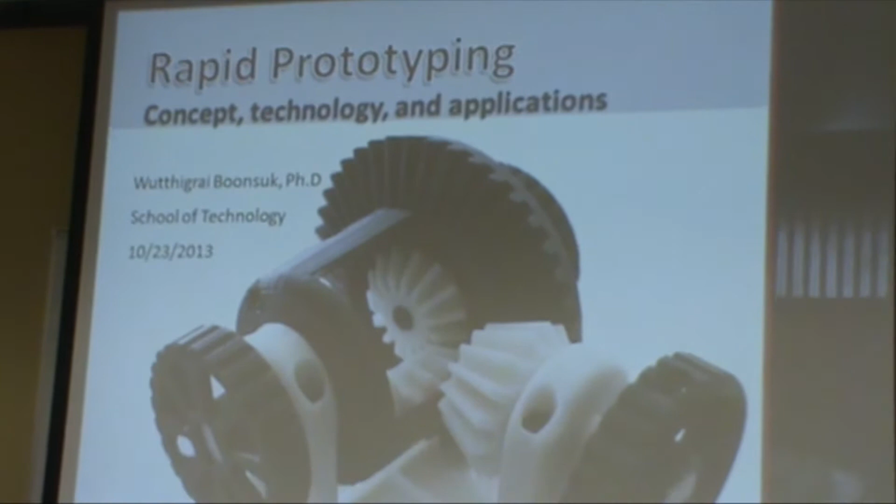Thank you, Dr. Wabai. So today I want to talk about rapid prototyping. Basically, we're going to go over some basic concepts and the idea behind the importance of this technology, why it's important, why do we need it, and also the applications for this technology that we can see in the market right now.

So let's start with what is rapid prototyping. Sometimes I call it RP, many people also call it RP in this case. So I have two definitions here. Basically it involves a machine that can automatically create a physical prototype from three-dimensional models, or sometimes we call it a CAD model, and it can create it in a very short period of time.

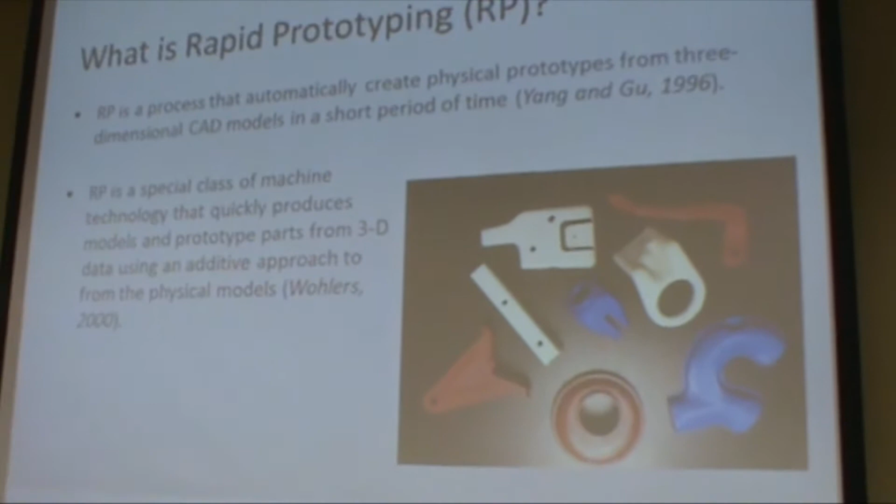So we've learned a little bit about RP from this definition, but I'm going to go into more detail about why this technology is important, why we need to know about it. So before we start talking about RP or rapid prototyping, let's go back a little bit and learn about why it's important to have a prototype. Why do we need a prototype?

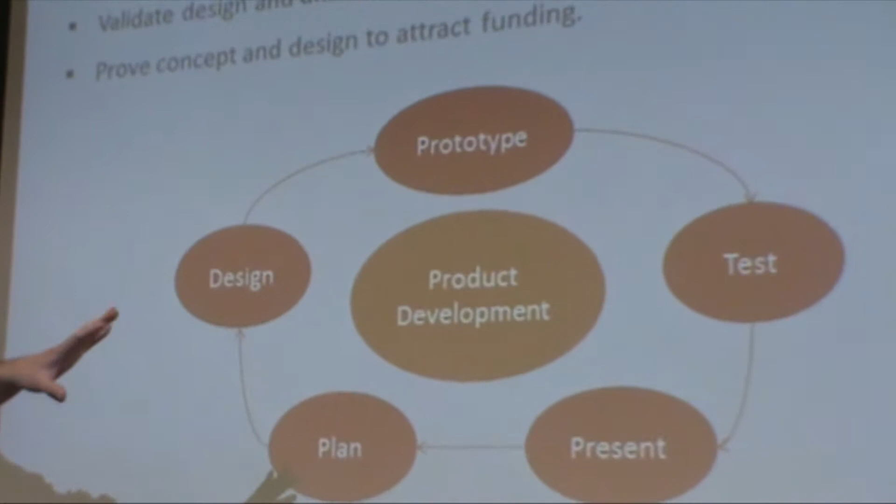Most of the time, prototype is involved in product development. It's kind of the main step in product development that you have to have. You can start from planning, designing, developing the prototype, and then make a test and present, go through some iterations until you get the final product's outcome.

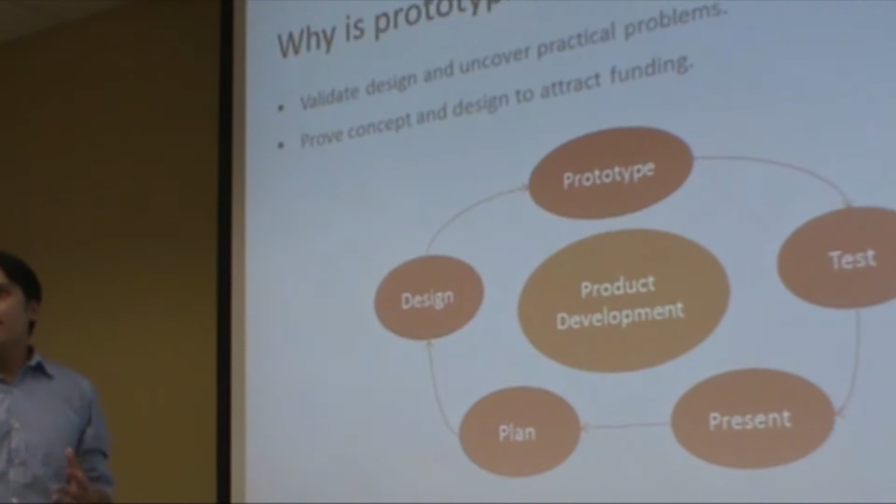Prototypes serve several purposes in this case, it's important to have a prototype because, first thing, you can validate your design. You can take a look at your prototype and look at what can be a problem with it. Sometimes you cannot really spot it if you look at it on paper or in your computer.

And also, a prototype is a proof of concept, right? Most of the time, people use it to attract funding. Without a prototype, it is sometimes hard to really tell your sponsor to support it.

So I kind of see this trend going on the internet, I'm not sure if many people here have seen it. Some small companies try to put their idea on a website and also make some prototype, then show how it works on the website and try to raise money using that website. So people who are interested in what they have or their idea make something like a pre-purchase, okay? So the company gets more funding and is able to push the products into real production. So I really see it becoming more and more this way. So I think that's how a prototype is very important.

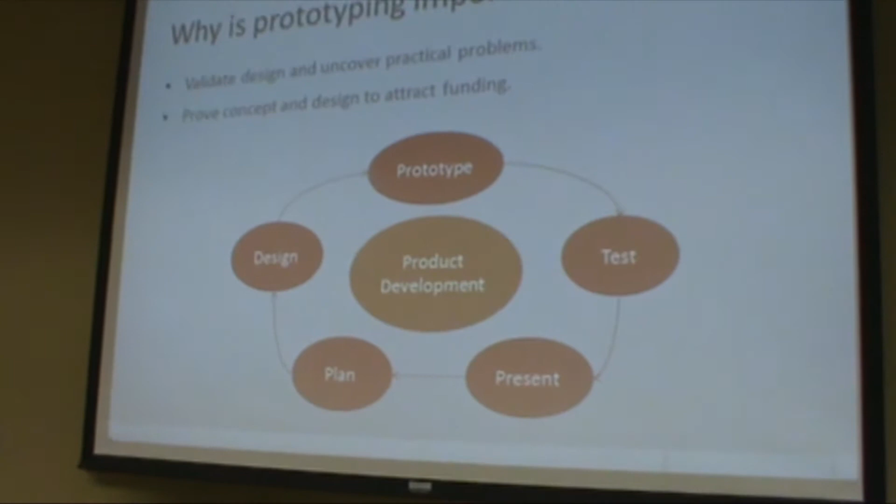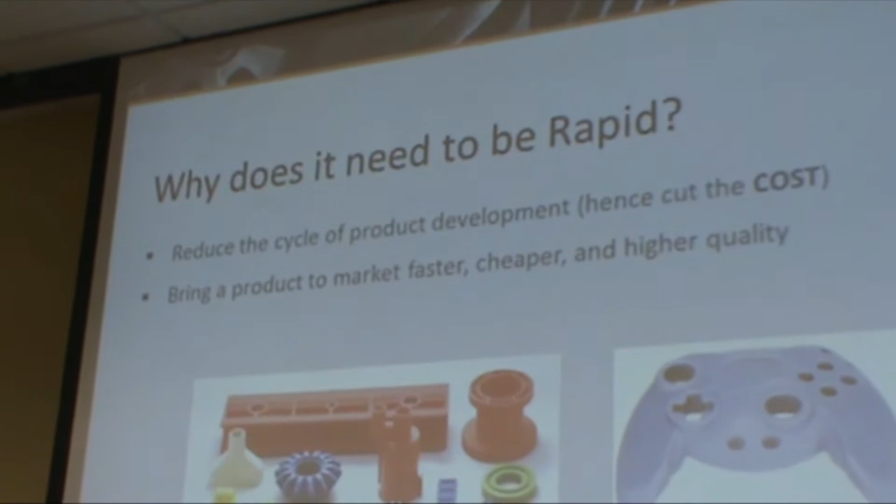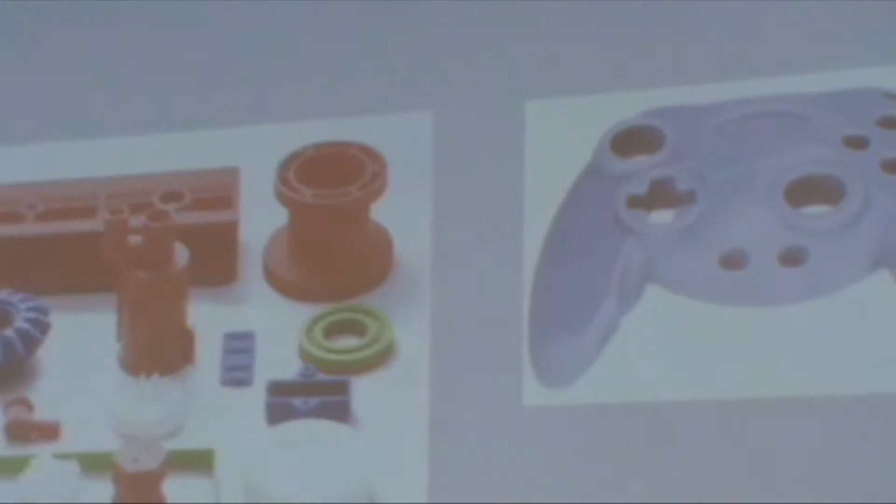So why does it need to be rapid? When you're able to prototype fast enough, you'll be able to reduce the cycle when you try to develop the products. And if you reduce the time, it absolutely helps you reduce the cost in production. You can bring your products to market faster, cheaper, and with higher quality, because you can validate your design and spot the problems before you have the final finished product. So prototyping will help you do that, and you'll be able to improve the quality of the products.

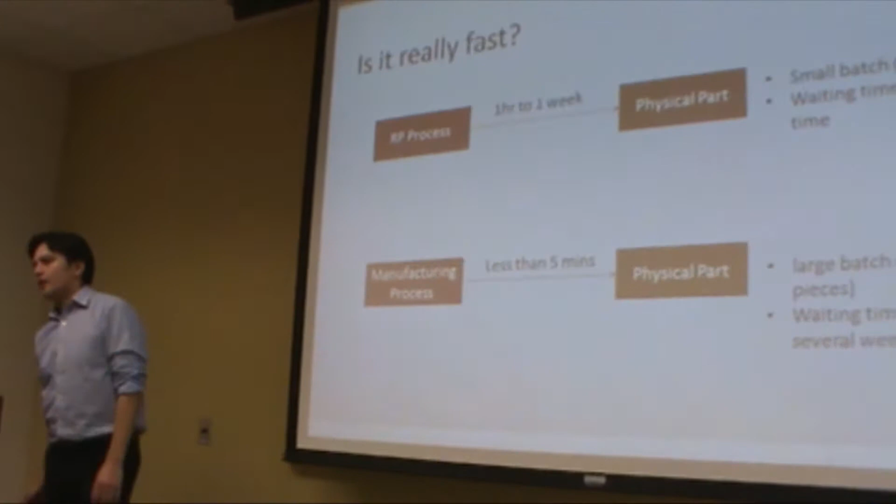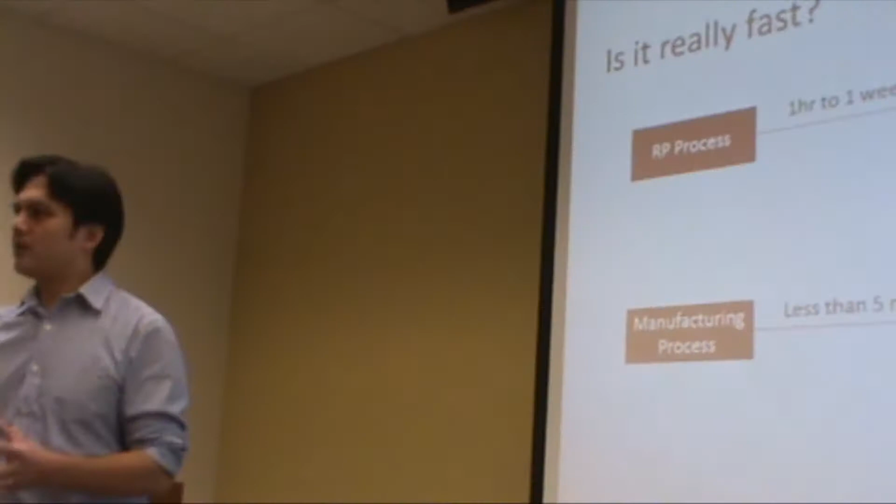It's kind of interesting that when we talk about rapid prototyping, we think we can create a prototype in a short period of time. It doesn't mean that this process is very fast. It's absolutely not fast. Rapid prototyping, the RP process itself, can take about 1 hour, 2 hours. It can be 1 day, 2 days, or even a week to create just one part.

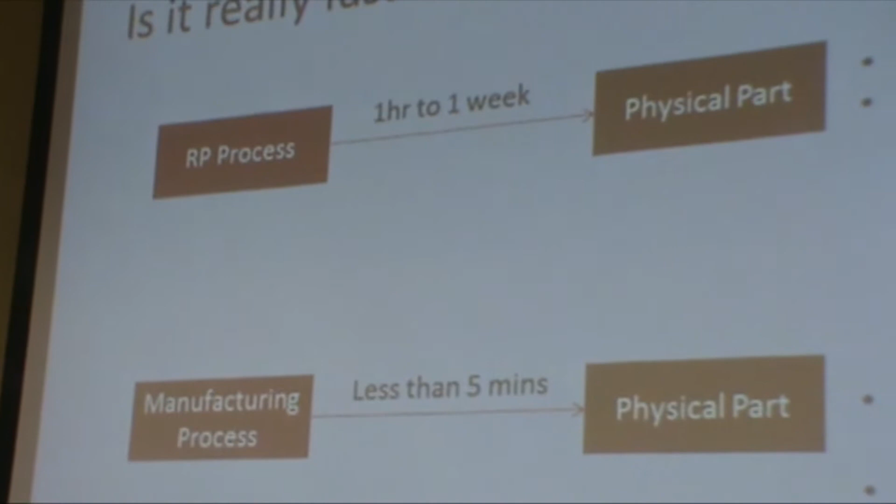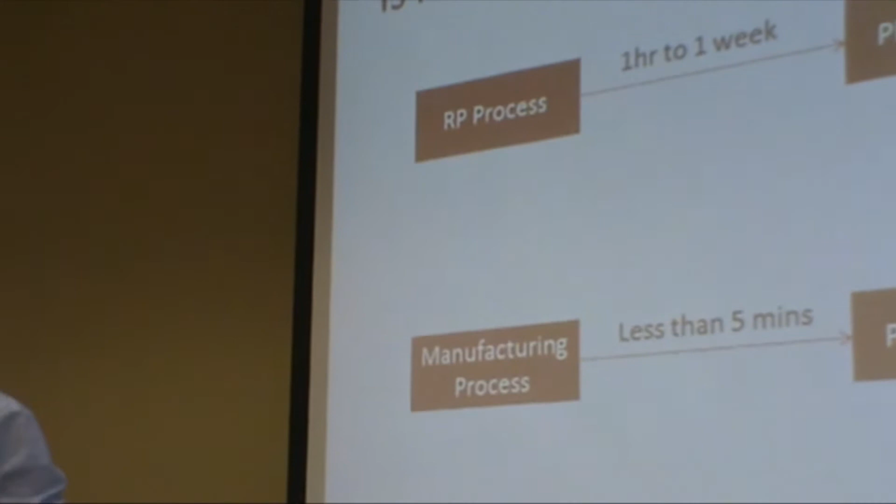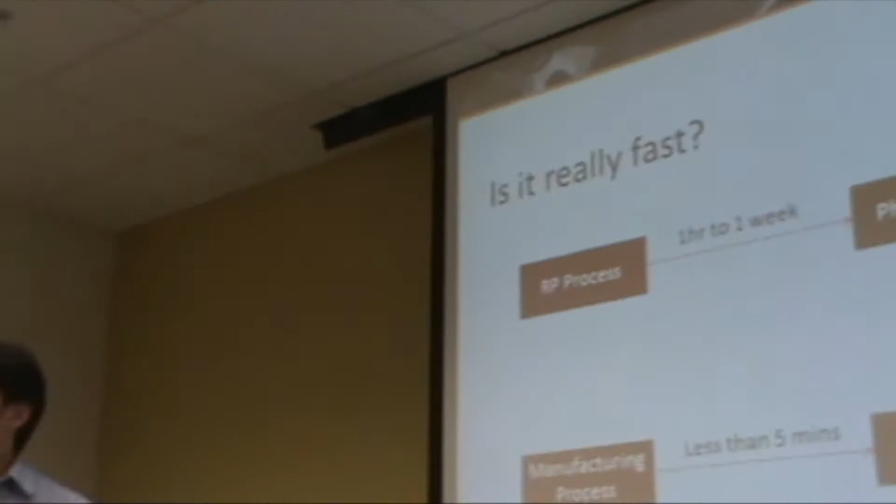If you compare it to a manufacturing process, something comparable like injection molding, the process for injection molding to make the finished part probably takes a couple seconds, 5 seconds, 10 seconds to get the real product out. So it's not really fast, but why do they call it rapid? Because the waiting time and the process time are equal. So basically, if you have the 3D model, you send it to the machine, you just wait until it's finished, and you get the prototype.

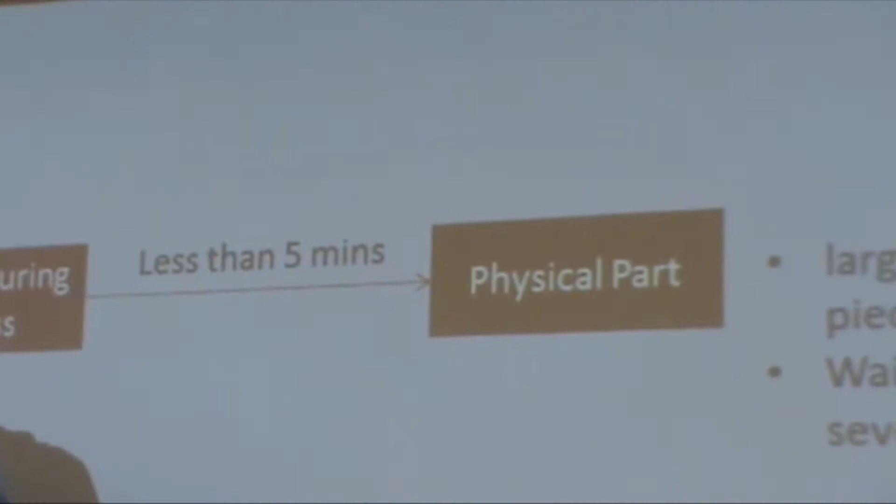For the manufacturing process, the problem is that you cannot order just one part or two parts. If you go to a manufacturer and ask them, can you make me 2 parts of this, they're going to say, if you order 2 parts or 100 parts, it will be the same cost. And the waiting time can go up to a couple weeks or even a month. The problem is in the manufacturing process, they need process planning to create the part. If you talk about injection molding, they need to make the mold, design the mold, acquire the materials, and then create the parts. So that time adds up to make the process longer.

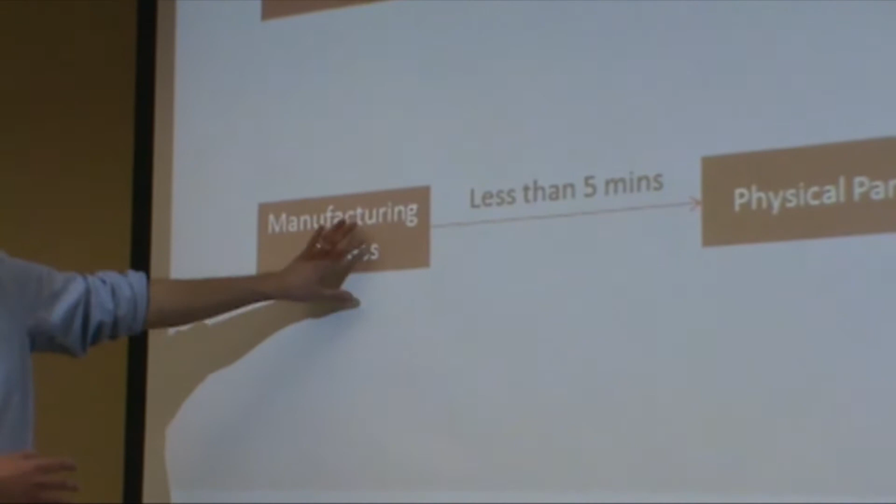Even though the real process is very short, the RP process serves it well. If you want to create just 1 or 2 parts, you just sit and wait. So this is why this technology has become more popular in the manufacturing field.

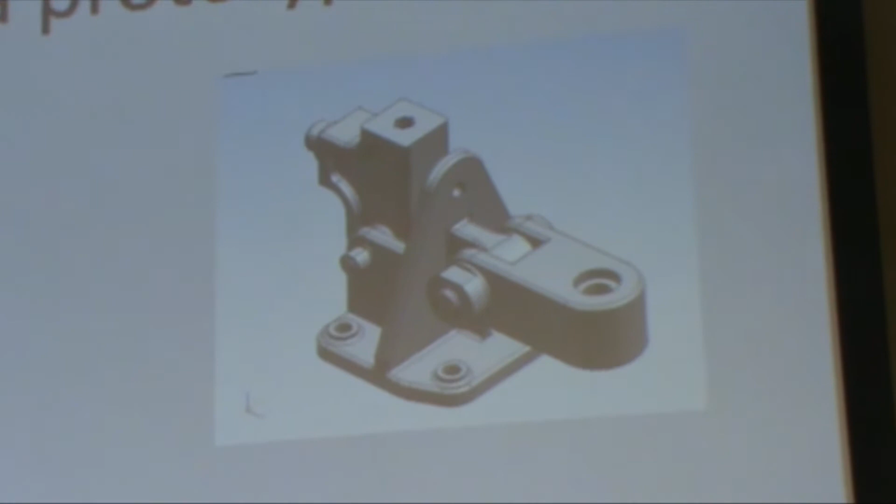So in the RP process, what do I need to make the prototype? Besides the RP machine and the computer, what you really need is just the CAD model, computer-aided design model. I know many people here are familiar with this term, but basically it's a computer model that you can design on the computer.

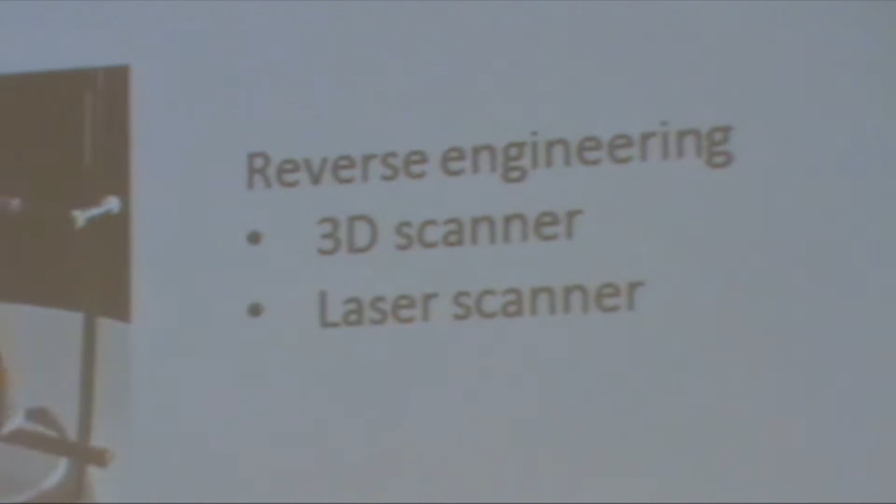So how do you get that model? There are a couple ways. The first one is you use CAD software, something very famous like SolidWorks, Solid Edge, Pro Engineer. This is when you create a design, you design your own physical part. On the other hand, if you have a part that already exists and you don't have the real CAD model, you can recreate it using a process called reverse engineering. Basically you use a 3D scanner, a laser scanner, so you're able to get the physical model and change it into the CAD model. That's how it works.

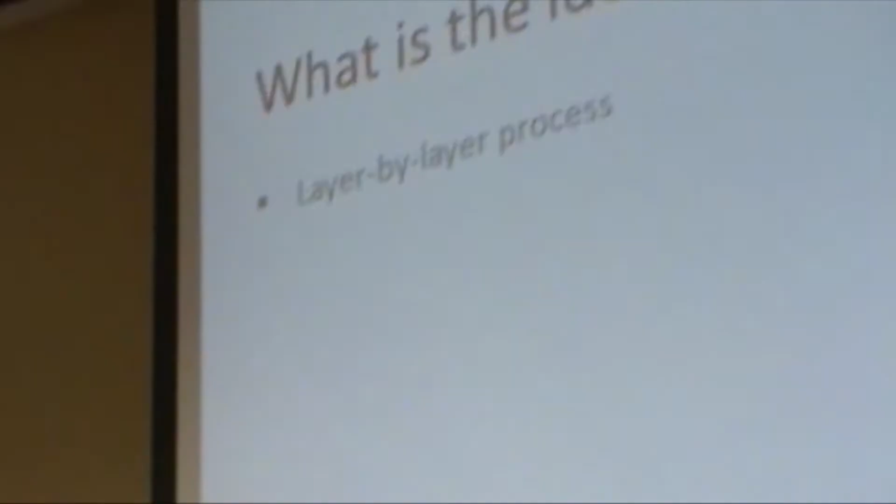What is the idea behind RP? Most of the time when we talk about RP technology, people think about layer manufacturing, additive manufacturing, a layer-by-layer process. So what does it actually look like? Let's say we have an apple, nice and crispy, red, delicious.

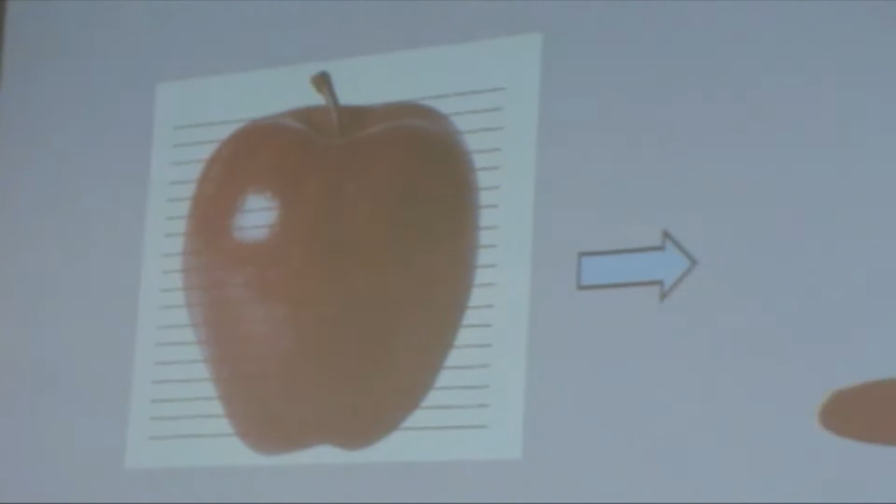Assume that this is your 3D model, and then what if we slice it, make it into very thin slices? What happens is you simplify the 3D geometry to make just a 2D cross section. If you take just one slice and put it here, it will look like this - just a 2D cross section or 2D slice of the apple.

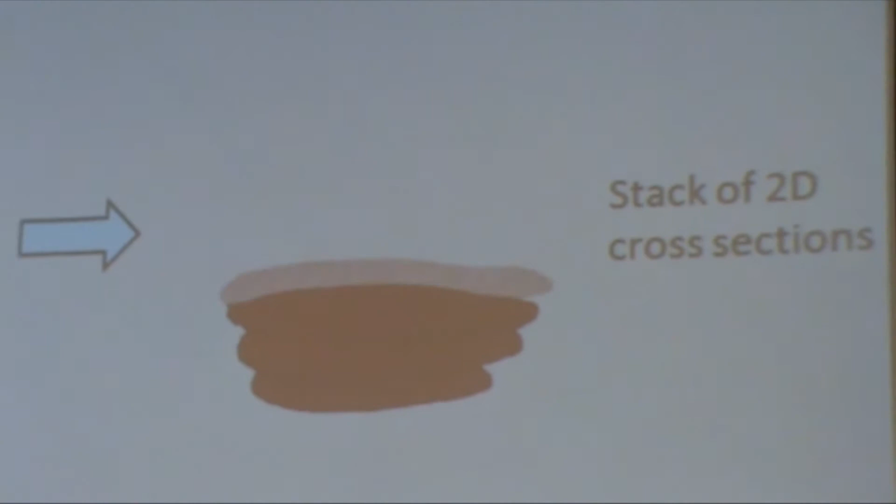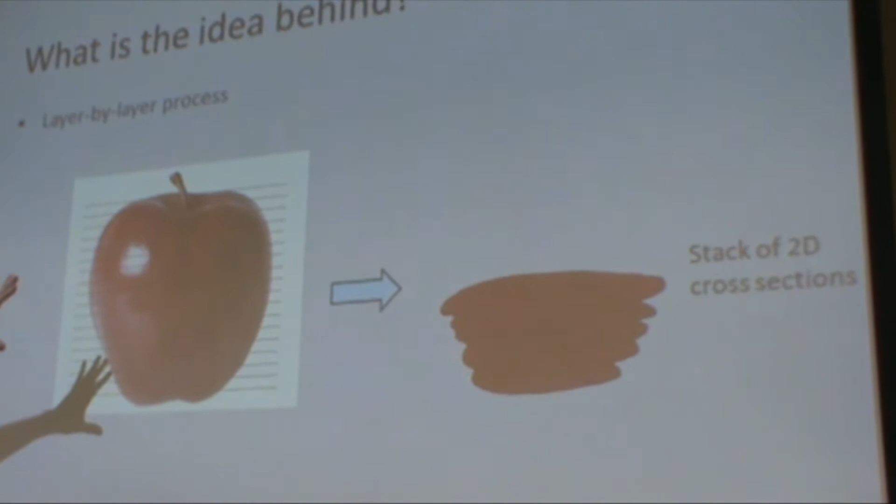And then what if we stack it up according to how you sliced the layers? You can see that you can really recreate the apple using something like this, and it's really simple and easy to do. So this is the concept behind the RP machine.

If you look inside the RP machine, you're really going to see something like this. This is one of the machines called a stereolithography printer.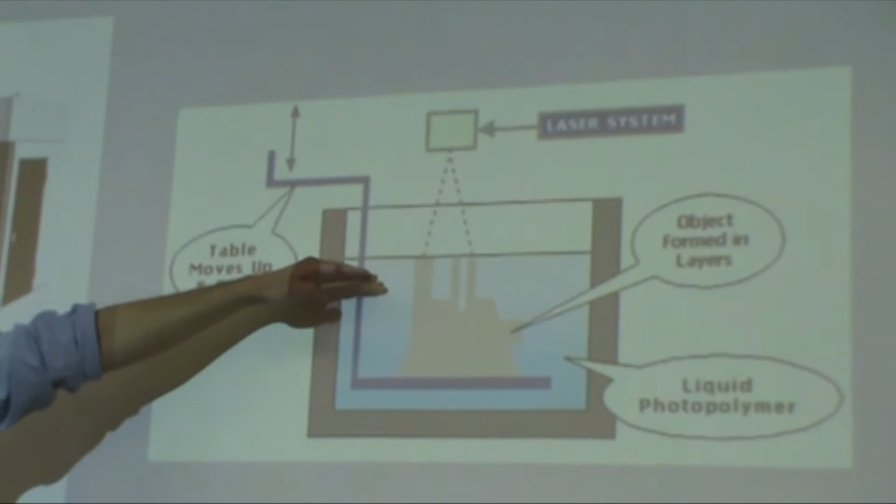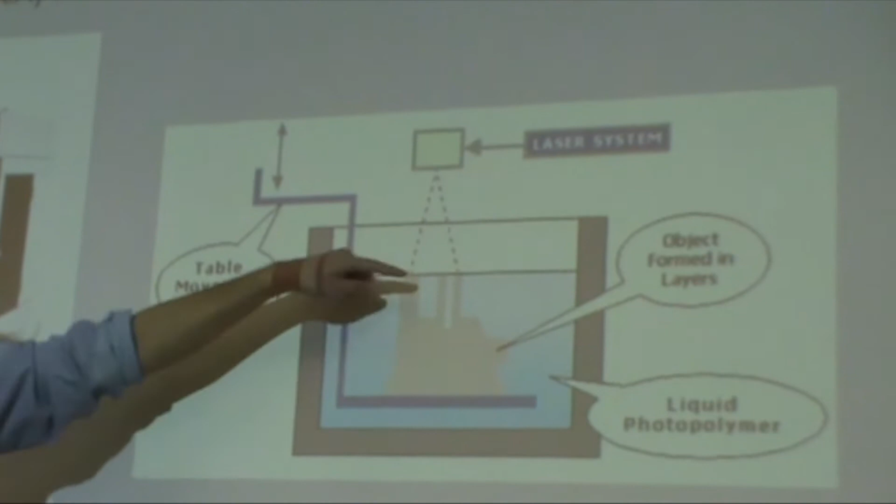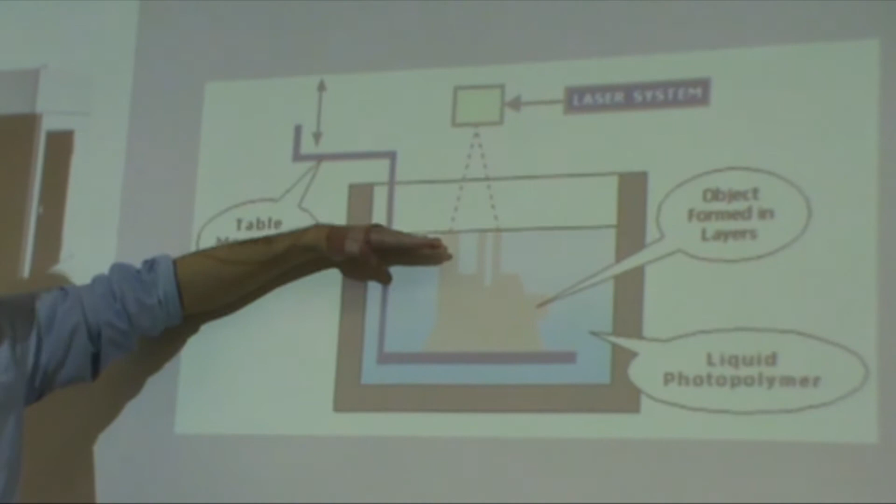So inside, there's a liquid tank with liquid polymer inside, and they have some kind of platform that dips into this liquid. We have a laser on top of the machine, and the laser will solidify the liquid polymer. For example, it starts with the first layer, and after it finishes, the platform drops down one layer, and the laser creates the second layer, and it keeps dropping down more and more until it finishes the part. So that's the idea behind the layer by layer process.

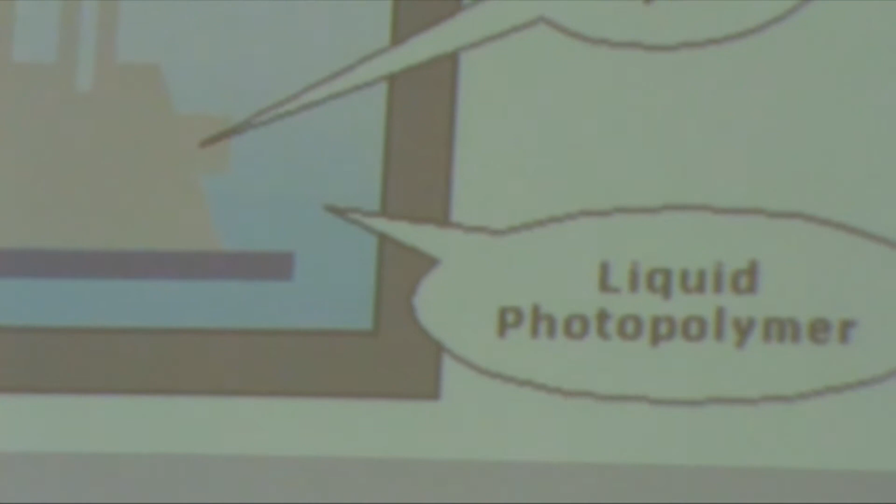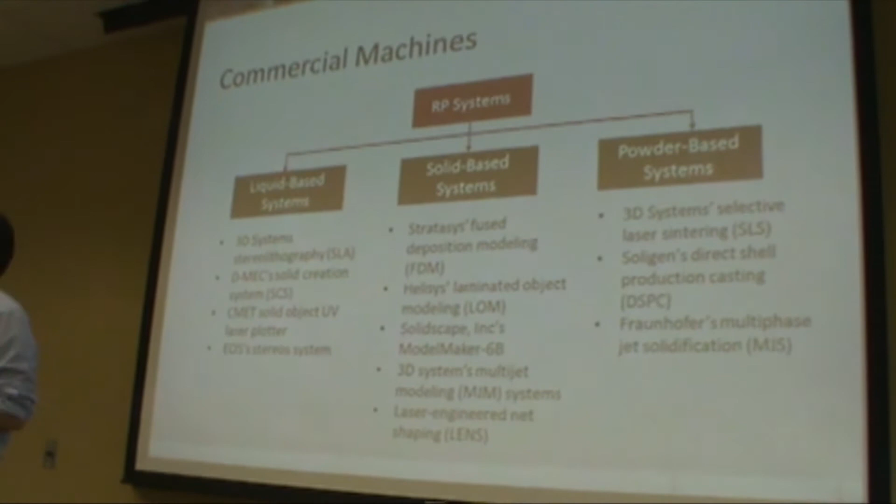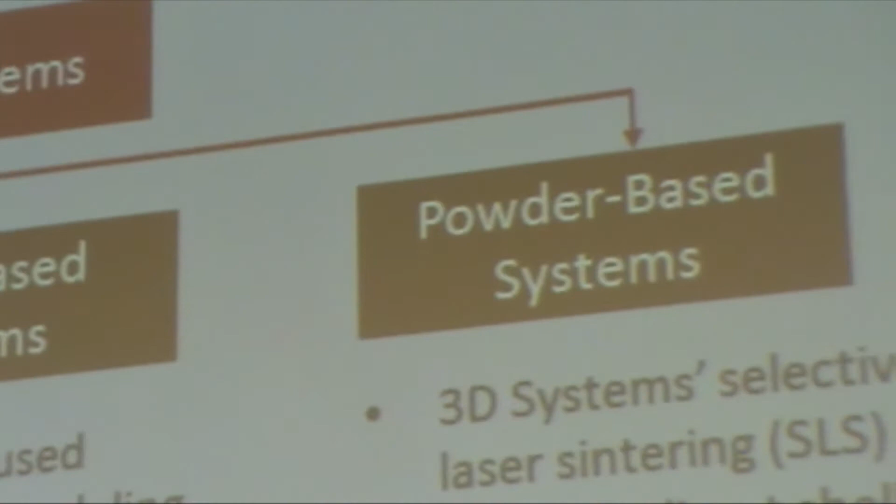RP systems have expanded a lot. We've seen since 1980 when they started developing the first machine, and right now there are so many of them in the market. If you search in Google for rapid prototyping machine, you will see maybe hundreds of them from different companies.

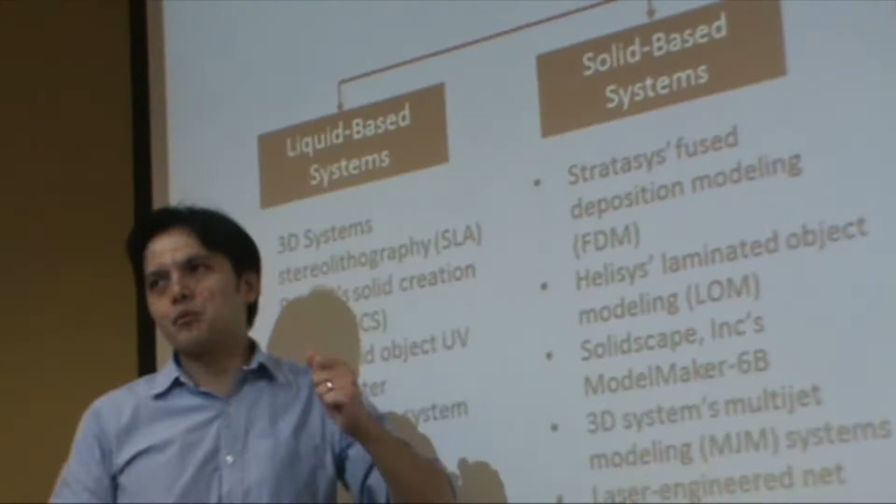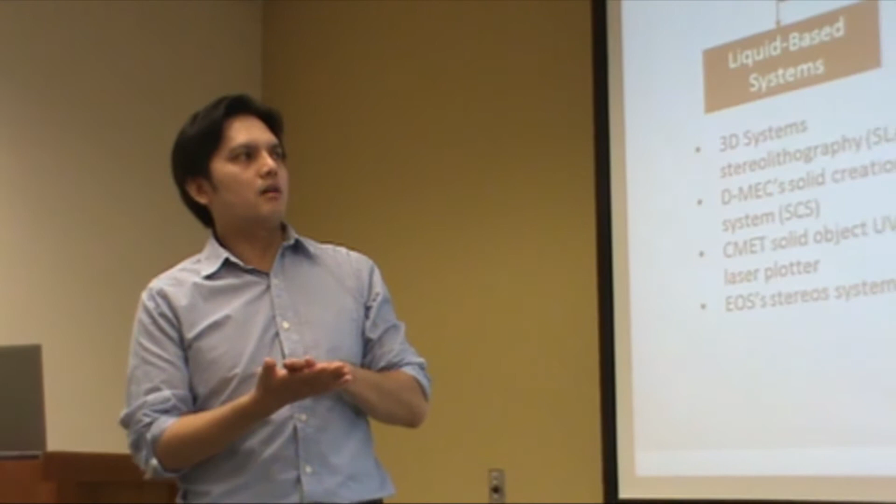If we classify them, you can make a classification based on the material they use: liquid-based, solid-based, and powder-based. All of them use the same technique to create the part layer by layer. For solid base, you have to melt the material and create it layer by layer. For powder base, you have to fuse the powder to make it solid. All use the same idea I've already described.

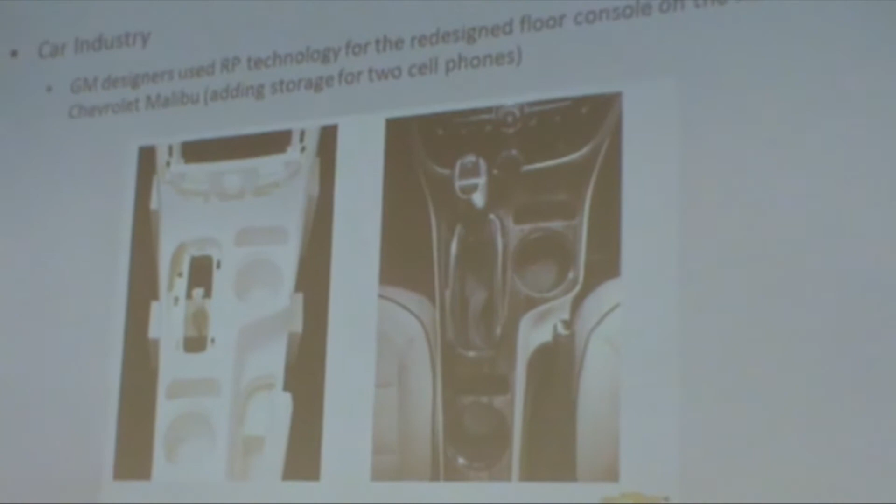So let's talk about the applications of RP. Besides using it for product development, there are a couple of companies that use it for some interesting applications that I want to share with you. First, starting with car companies - this is still used for product development, but it's interesting how they use it. They use RP technology to create the console of the car.

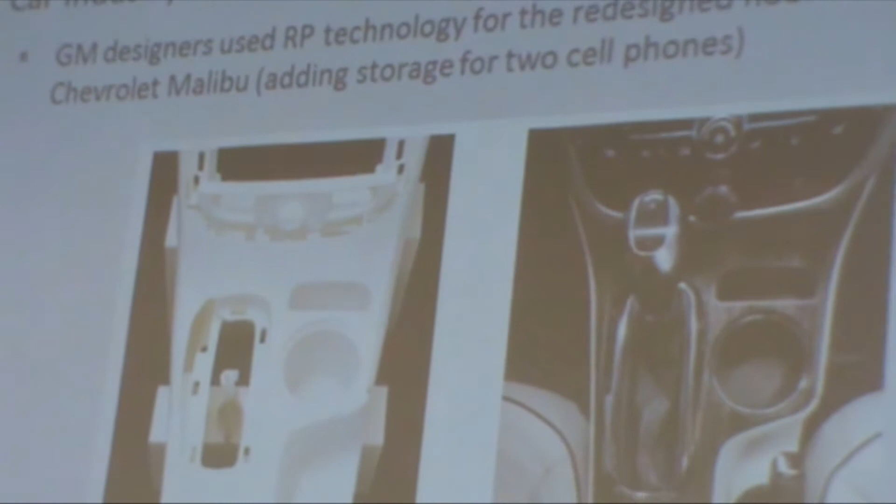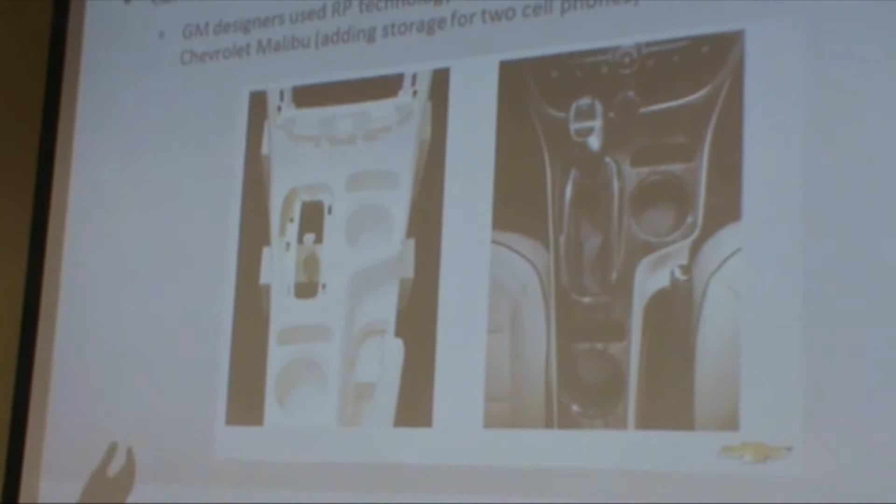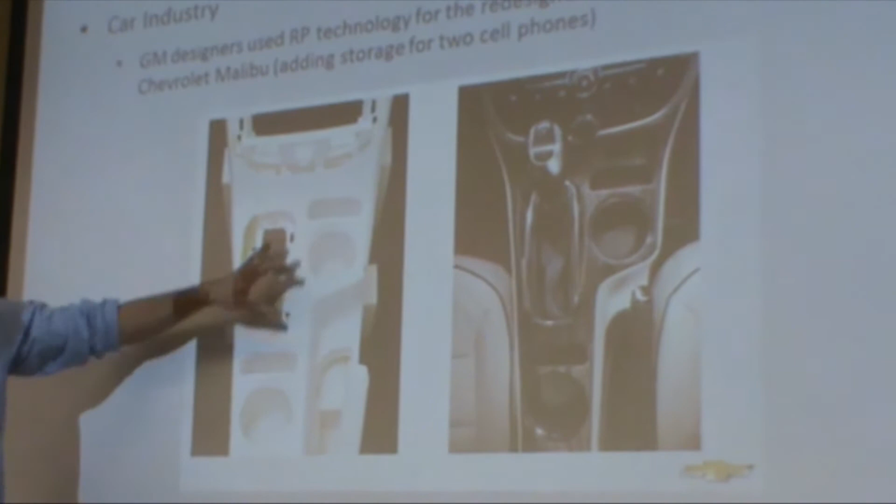This is for a Chevrolet Malibu 2014, so I'm not sure if it's already out or still in production. They create the console and put it inside the real car, having people come in to do a pre-test to see how it works, if it's going to work well with the car. What they try to add are two slots for the cell phone.

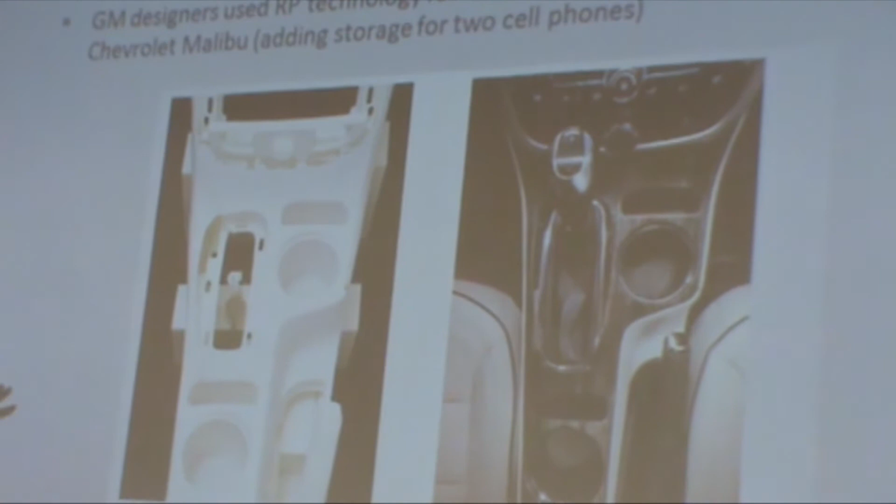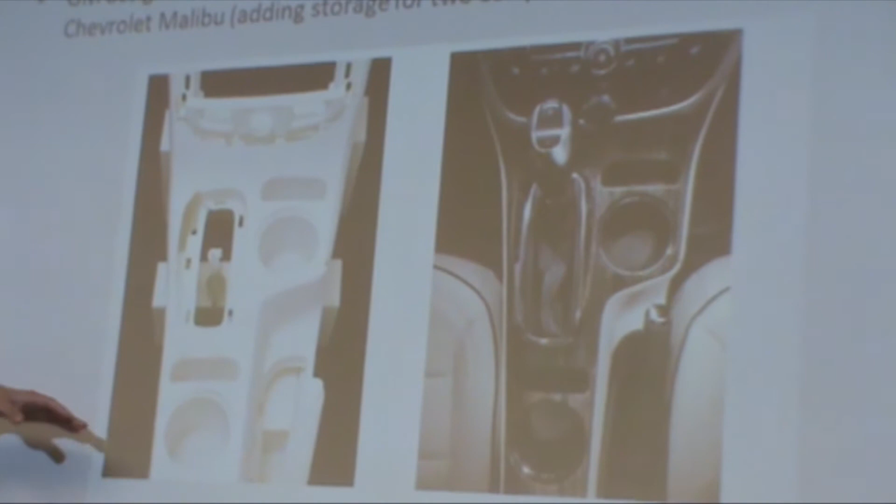Almost everyone has at least one cell phone, so there are two slots added to the console that they think is probably a good idea. They have customers or other people come in to test it - if the position works well, something like that - doing iterations on this product to see how it works. What's shown here is the final console in the real car, created after this was verified by people in the company.

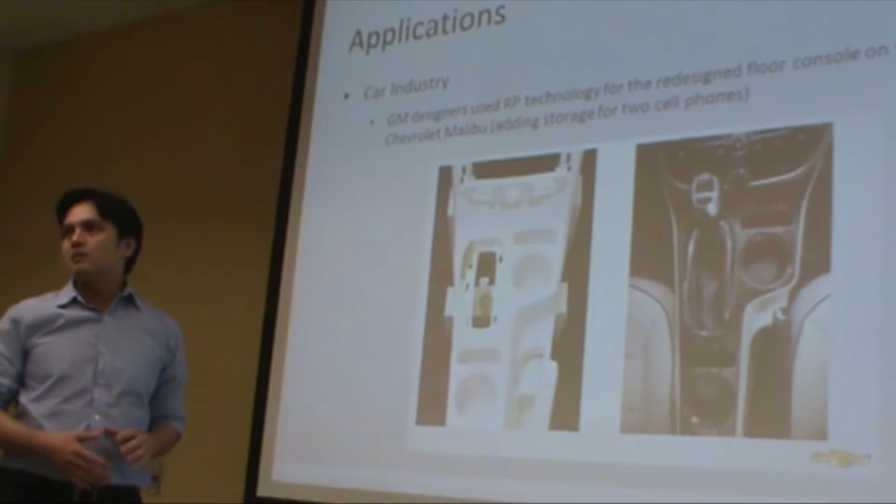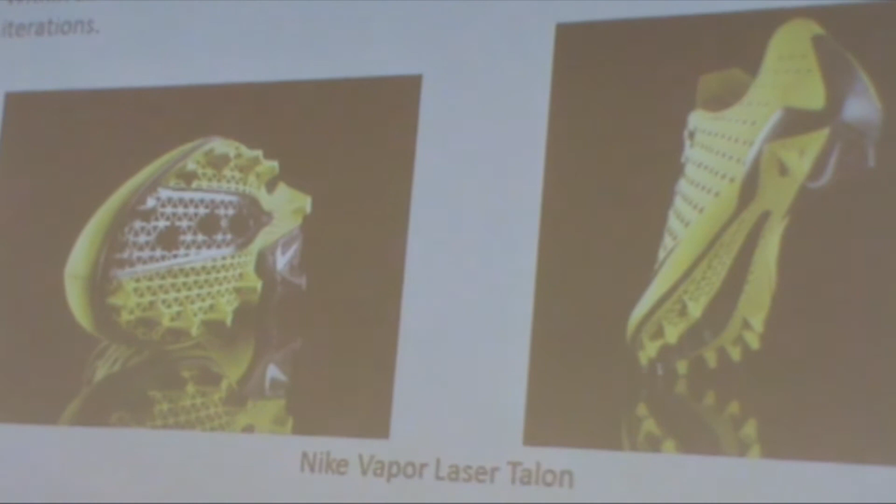Another interesting application is consumer products - the shoe companies, I think one of them is Adidas, also use it. Nike also uses 3D printing to create prototypes.

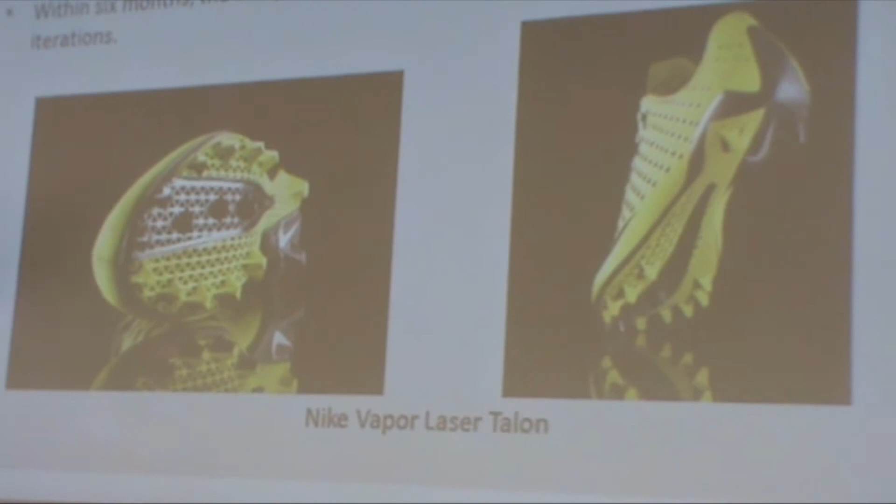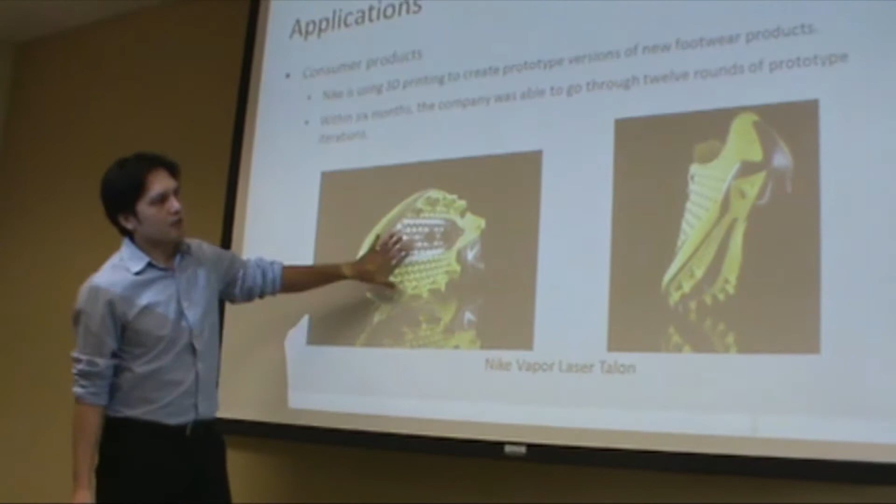The company claimed that within 6 months, they can do about 12 iterations of their prototype. That's a lot of improvement compared to before - probably they used to have like one month per iteration. So this is a huge improvement, and the products can develop even faster than normal. What's shown here is the first shoe produced using rapid prototyping technology.

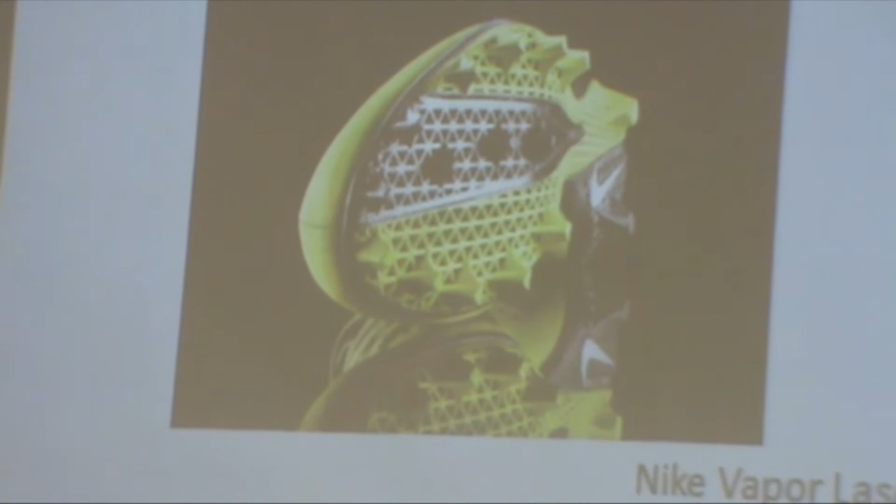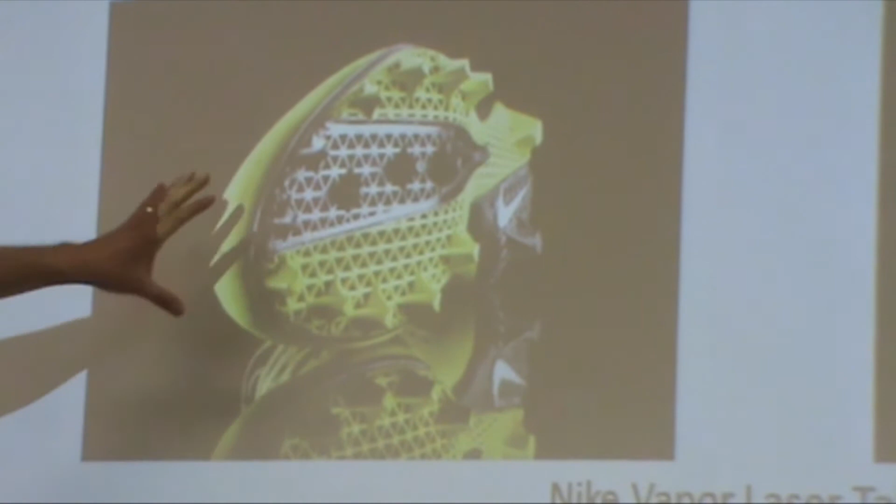They print out the bottom part of the shoe, and this shoe is for an NFL football player, so it's really for a specific group. As we know, the RP process takes quite a long time to create one piece of the product or prototype, but this works well because not many people are going to use this kind of shoe. So it's suitable for this specific group, and I think it's a great fit for this technology.

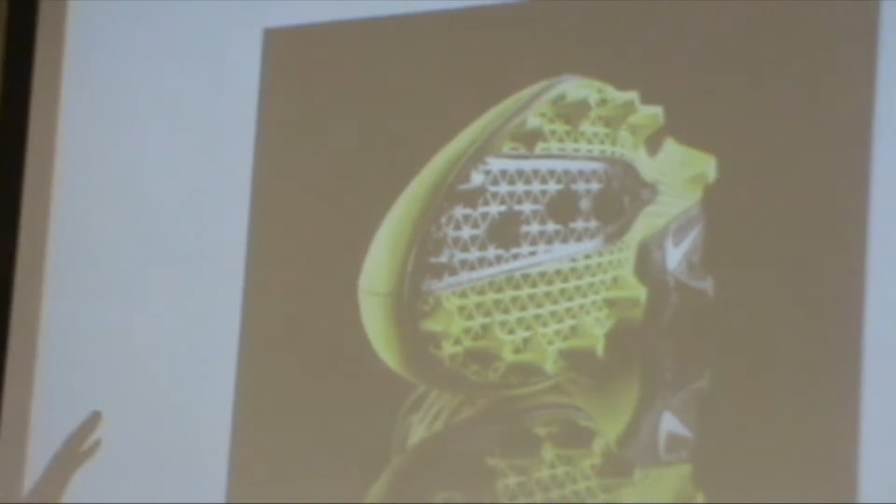Okay, the other application—if you look at some medical industry—RP has also grown there. The company used EBM machine or electron beam melting to develop custom implants for the patient. So the implant is made from titanium and other compounds to put inside the patient.

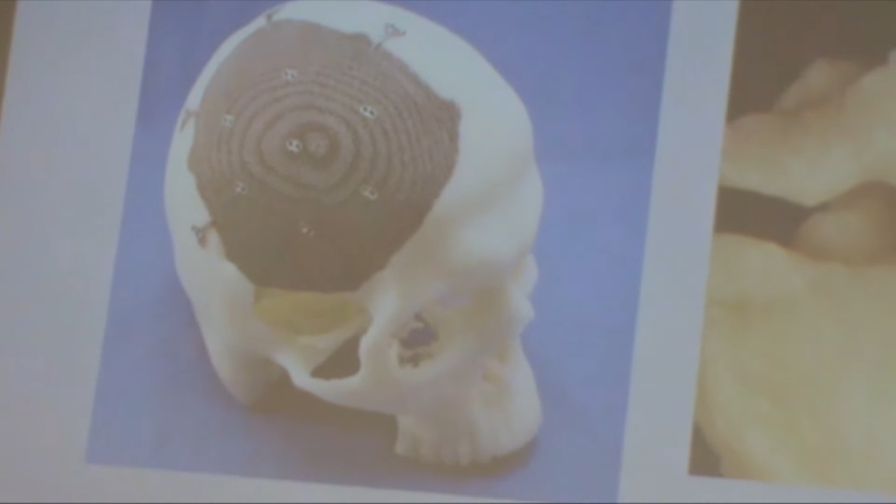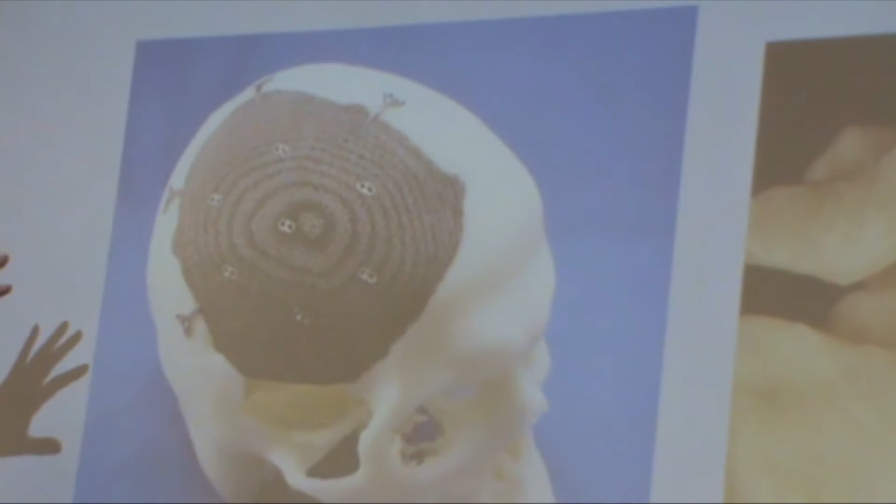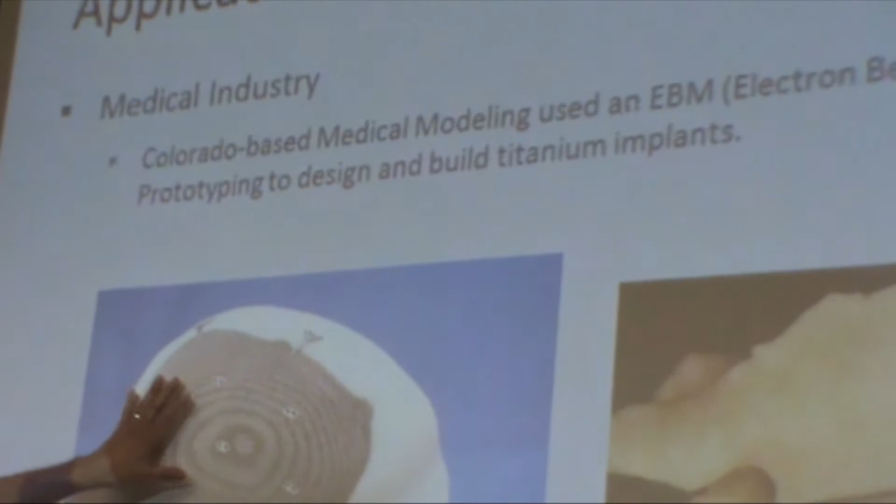The good thing about this material is that it allows the soft tissue to grow around it. This is really important because if you come into this field, you know that some implants get rejected by the patient's body because they're not very suitable for them. In this case, they're able to develop material that really helps reduce the risk of rejection from the patient.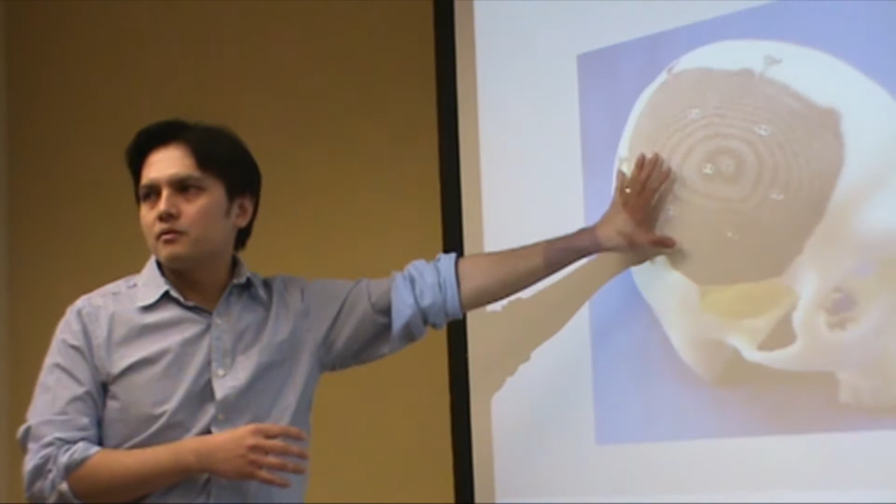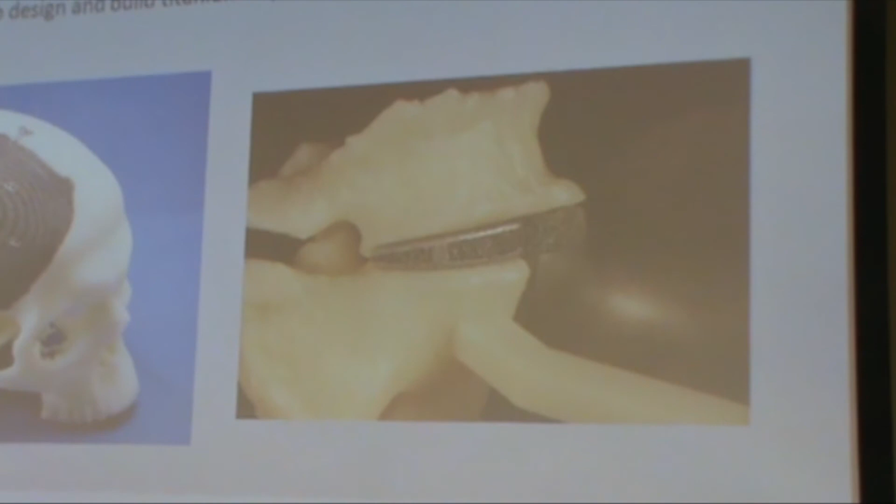And also the most important thing, they can create a really custom fit to the patient. So instead of going to a manufacturer and having them produce like 100 pieces to give to just one patient, you can just print it out using this RP technology—really customized to one customer. So very interesting, and I think it fits well for RP technology in this type of application.

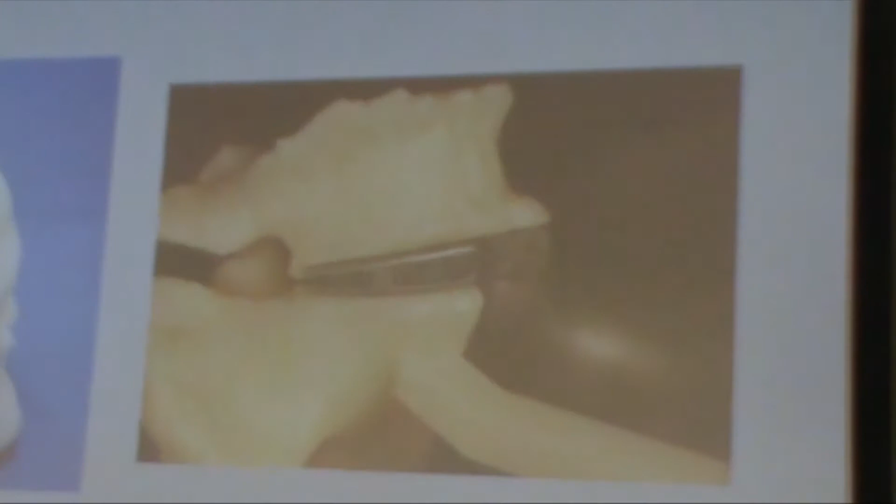What was the other picture? This one, I think—if I'm not mistaken—it's probably a kneecap.

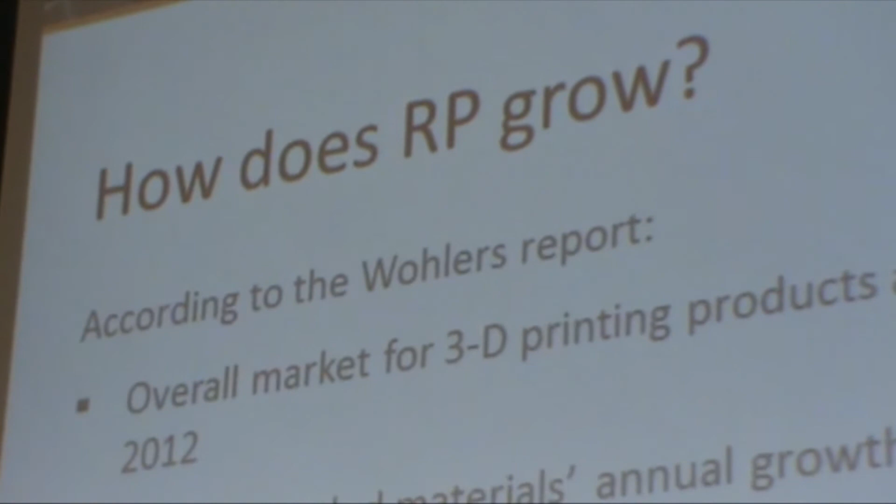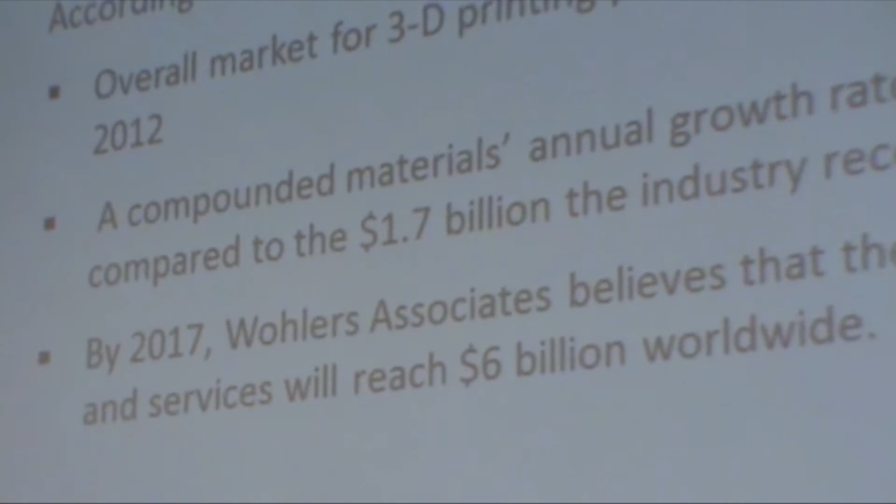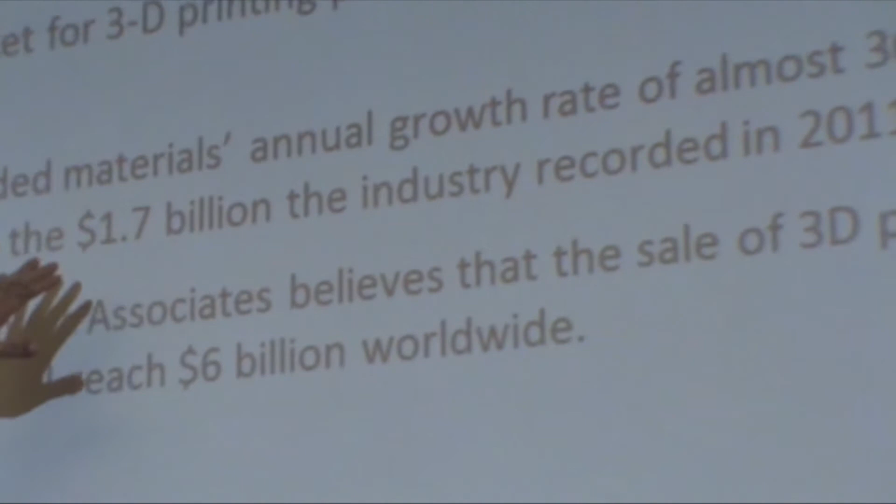By 2017, the prediction is that 3D printing products and services will even grow bigger, reaching about 6 billion worldwide. So you see that this technology is really growing.

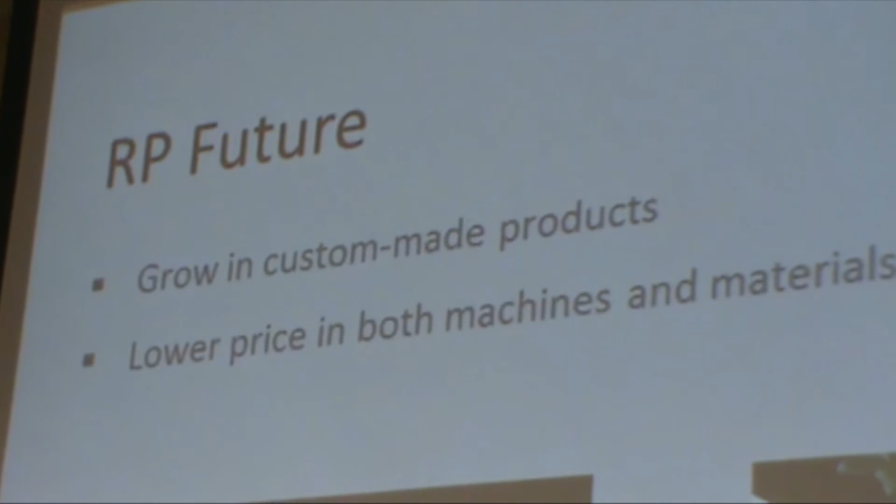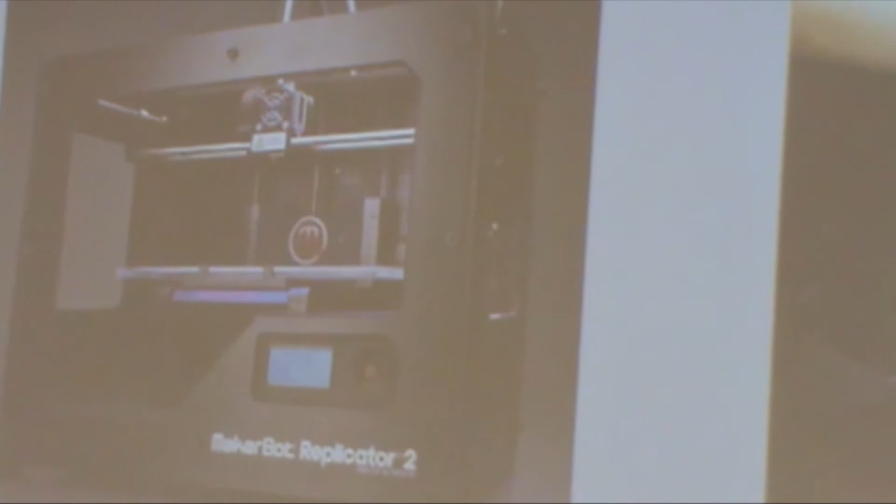So what would be the future of this RP technology? In my opinion, I think it's going to really grow in custom-made products, because it can produce only one or two parts, it's really low cost compared to other production methods, and it's easy to make.

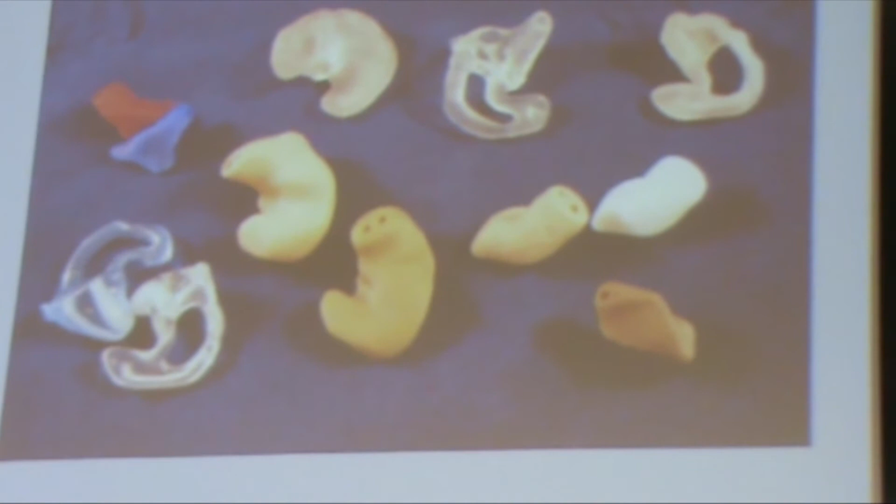Something like I showed here, like a hearing aid. Most of the time, if you use a standard hearing aid, it doesn't fit really well and it drops for the patient. So if you use RP technology, you can really customize it—you can scan the ear and design something that fits well to the patient. I think it's really going to grow in this area.

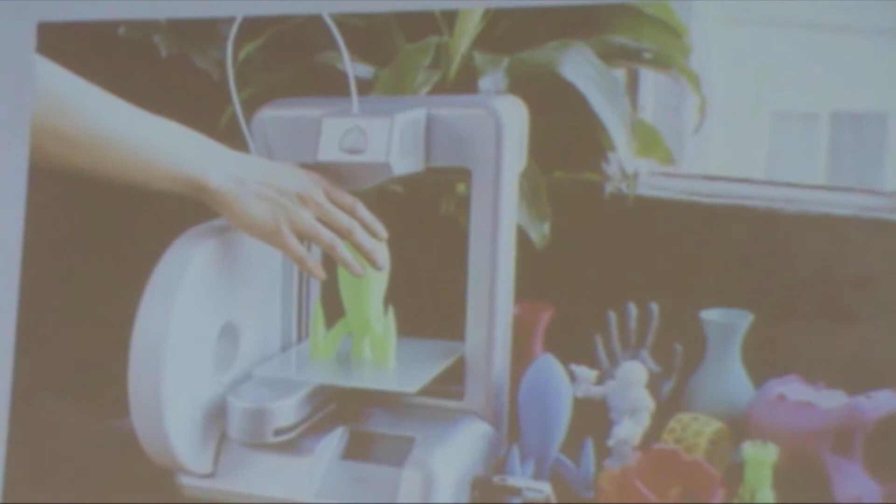As well as that, the trend now is the price of the machine and material getting lower. Five or ten years ago, an RP machine cost about 10,000 or 20,000 bucks—a very expensive machine to invest in.

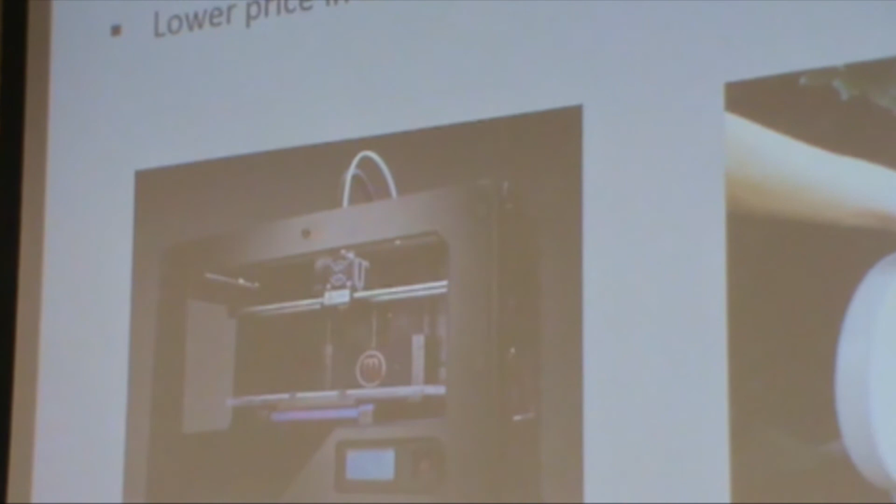But now you can see several companies launching smaller machines, making it easier for consumer products. There's the MakerBot, which starts at just 2,200 bucks. And the Cube 3D printer from 3D Systems starts at just 1,300 bucks. So it's getting cheaper and cheaper.

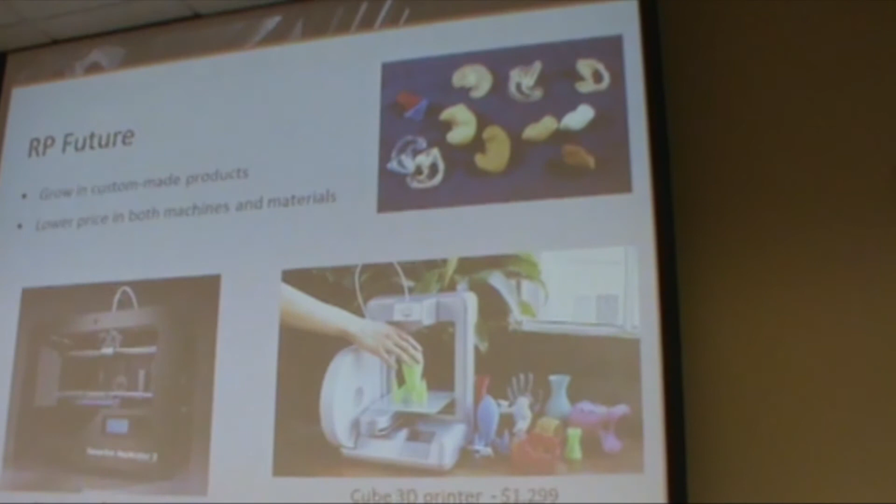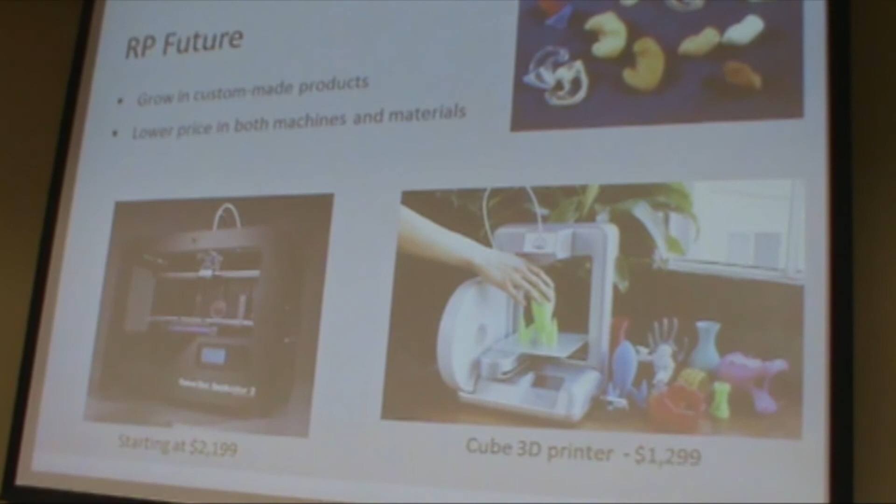So I imagine in the future, not only will you have a printer to print on paper, but you'll have this kind of printer to print your 3D products, for your hobby or whatever. So that will be all my presentation, and hopefully everyone has learned something about RP today. Thank you very much. Any questions?

Yes, I have one to start with. There are some applications that came into the news lately about creating living body parts, like a liver or a kidney or something—using the same technology or a different one?

I have heard about that. There's a company in Germany—they have this technology using a 3D printer, but they can print soft tissue. I'm not quite sure how far they've gone with it, but it's kind of new, and I think it needs more investigation in order to really make it work.

What's amazing is how they use non-living material to create a living member—I mean, it's kind of... very good. Any other questions?